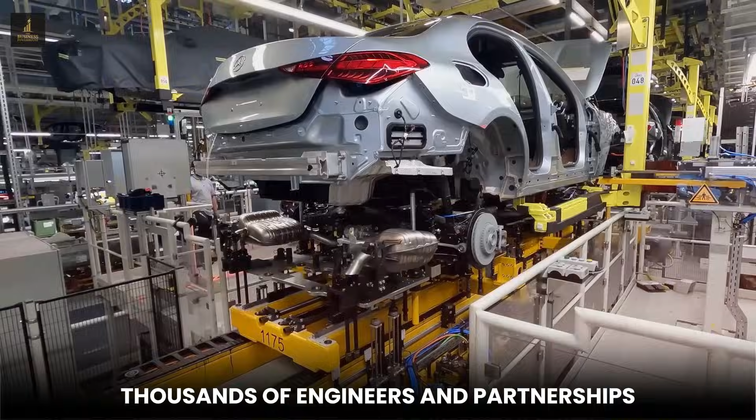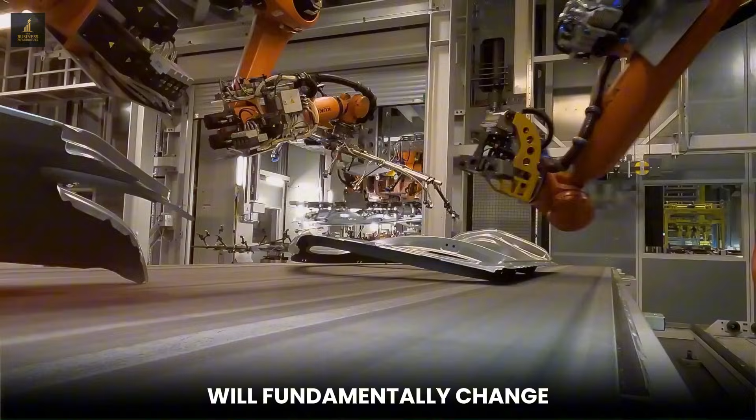NVIDIA just changed everything. After 8 years of development, thousands of engineers, and partnerships with the world's most prestigious automakers, they've cracked the code on truly intelligent, autonomous driving. And what you're about to see will fundamentally change how you think about the future of transportation, robotics, and AI. This is the story of Alpamayo, the world's first reasoning autonomous vehicle, and it's just the beginning.

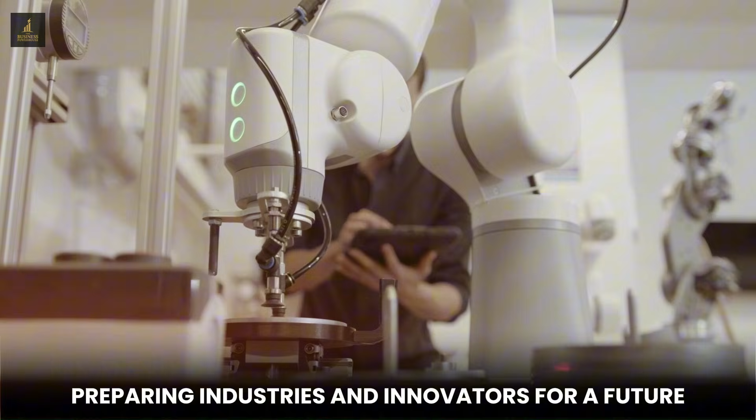One, the foundation model revolution. The world of artificial intelligence is entering a new era, and at the forefront stands Cosmos, the world's leading foundation model for physical AI. This groundbreaking technology has been downloaded millions of times globally, preparing industries and innovators for a future where AI doesn't just think, it acts in the physical world.

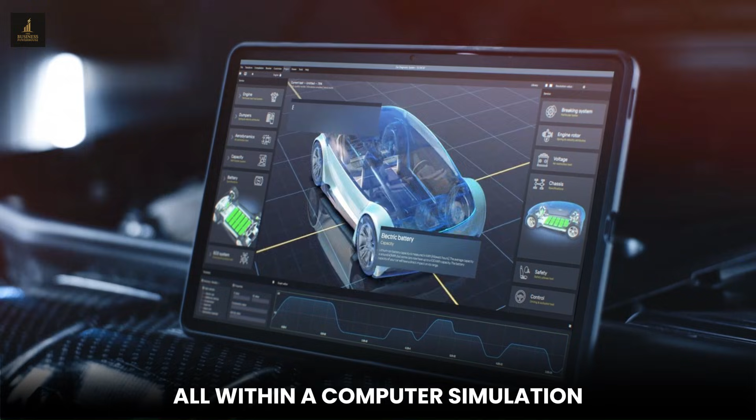NVIDIA has leveraged Cosmos internally to revolutionize self-driving technology. Through advanced scenario generation and rigorous evaluation systems, they've created a platform that allows vehicles to effectively travel billions, even trillions of miles, all within a computer simulation. This virtual testing ground has enabled unprecedented progress in autonomous vehicle development, compressing years of real-world testing into accelerated digital timelines.

The foundation has been laid, the technology has been proven, and now NVIDIA is ready to unveil something extraordinary that will transform how we think about transportation, safety, and the future of mobility. This isn't just another incremental improvement in autonomous driving. This is a complete reimagining of what vehicles can do, how they think, and how they interact with the world around them.

2. Alpamayo, the thinking car. Today marks a historic milestone in automotive history: the announcement of Alpamayo, the world's first thinking, reasoning autonomous vehicle AI. This isn't your typical self-driving system. Alpamayo represents a fundamental breakthrough in how autonomous vehicles process information and make decisions.

Trained end-to-end, literally from camera input to vehicle actuation, Alpamayo processes visual data and directly controls steering, braking, and acceleration. But here's where it gets revolutionary. The system was trained using millions of miles of human driving demonstrations, combined with vast amounts of synthetic data generated by Cosmos. Hundreds of thousands of examples were meticulously labeled to teach the vehicle exactly how to navigate complex, real-world scenarios.

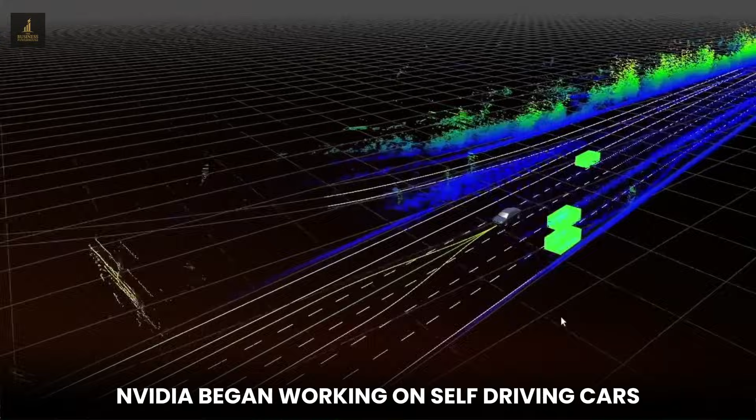4. The 5-layer AI stack. NVIDIA began working on self-driving cars 8 years ago with a singular vision: deep learning and artificial intelligence would reinvent the entire computing stack. To truly understand and guide the industry toward this future, they needed to master building every layer of the system. Think of AI as a 5-layer cake, with each layer essential to the whole.

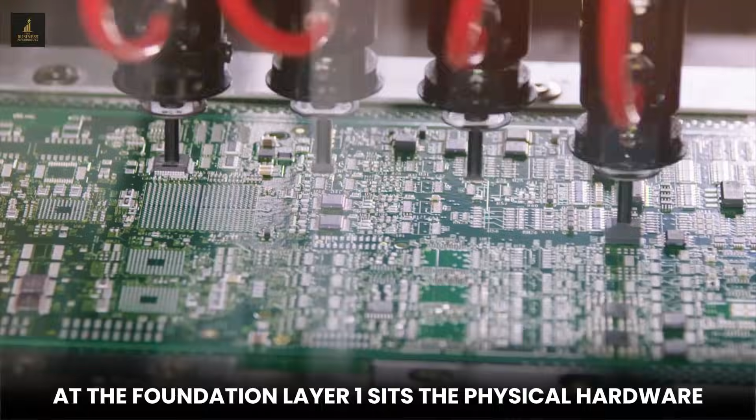At the foundation, Layer 1, sits the physical hardware. In robotics and autonomous vehicles, this is the car itself, the platform that houses everything above it. Layer 2 comprises the computational chips: GPUs for parallel processing, networking chips for data transfer, CPUs for system control, and specialized processors designed specifically for autonomous systems. These aren't off-the-shelf components. They're purpose-built for the extreme demands of real-time decision-making in safety-critical applications.

Layer 3 is the infrastructure, the environment where AI learns and evolves.

For physical AI, this means Omniverse and Cosmos, sophisticated simulation platforms where vehicles can train in countless scenarios without ever touching pavement. Layer 4 contains the AI models themselves. This is where Alpamayo lives, the neural networks that perceive, reason, and act. Finally, Layer 5 is the application, the actual product consumers experience. In this case, that's the Mercedes-Benz vehicles that will soon navigate our roads autonomously.

The Mercedes-Benz partnership: 5 years ago, Mercedes-Benz made a bold decision to partner with NVIDIA to bring truly autonomous driving to production vehicles. Today, that vision becomes reality. Alpamayo is now open-sourced, representing the work of several thousand people on NVIDIA's autonomous vehicle team, alongside the partnership with Ola and the commitment from Mercedes-Benz.

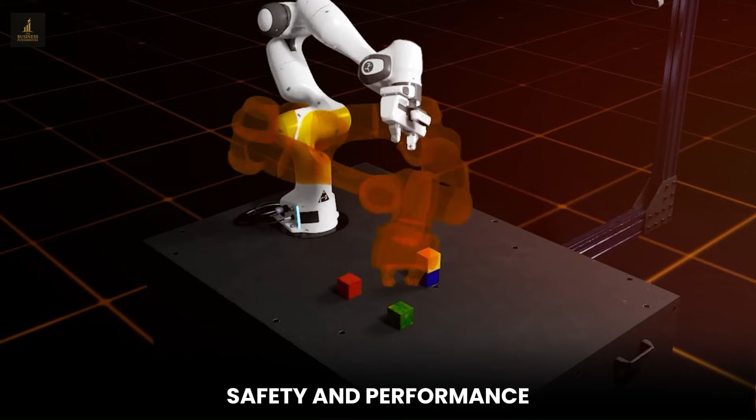In this ecosystem, Alpamayo serves as the model layer, the intelligence that makes decisions, while Mercedes-Benz provides the application layer, integrating this technology into vehicles that meet the highest standards of luxury, safety, and performance. This represents NVIDIA's first, complete, vertically integrated stack endeavor, from silicon to software, from simulation to real-world deployment.

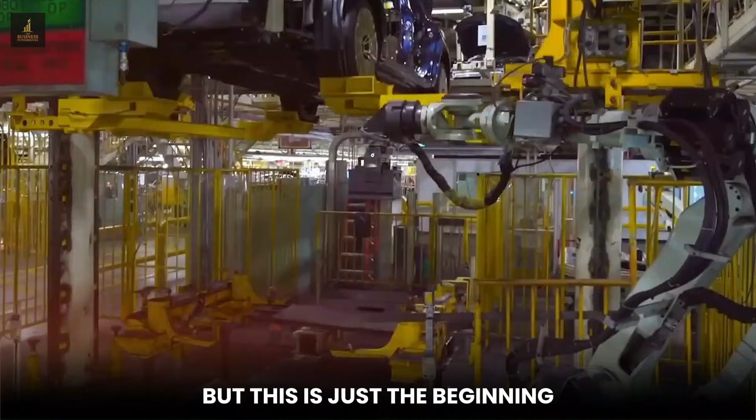The rollout begins in Q1 with the United States market, expands to Europe in Q2, and reaches Asia in Q3 and Q4. But this is just the beginning. The system will continuously improve with updated versions of Alpamayo, each iteration smarter and more capable than the last.

The world's safest car. Safety isn't just a feature in autonomous vehicles, it's the fundamental requirement. The Mercedes-Benz CLA, equipped with NVIDIA's autonomous driving technology, has just been rated by Euro NCAP as the world's safest car.

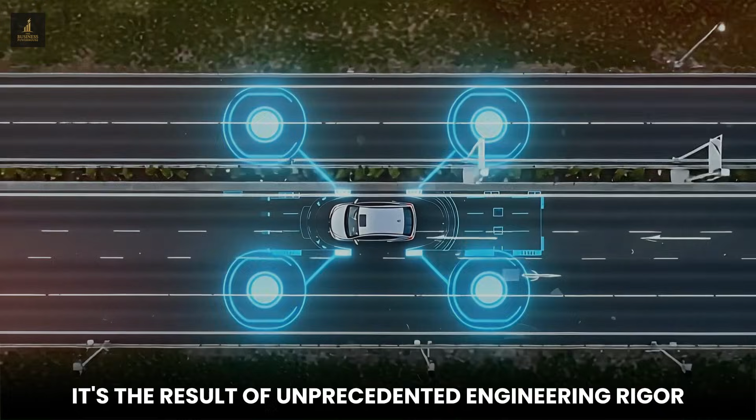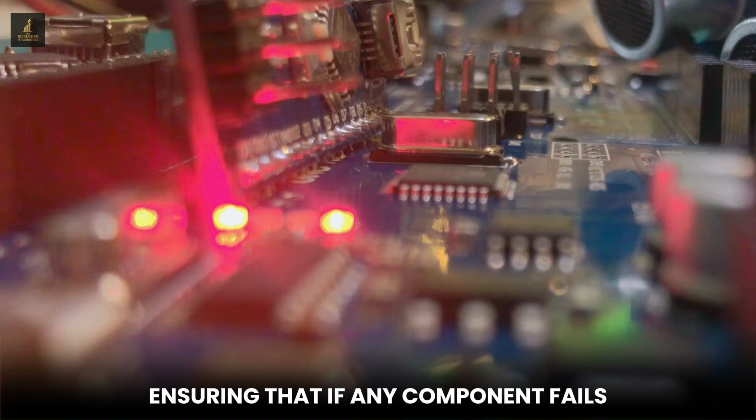This isn't marketing hyperbole, it's the result of unprecedented engineering rigor. This is the only automotive system where every single line of code, every chip, every system component has been safety certified. The sensor architecture employs diversity and redundancy, multiple sensor types, multiple sensors of each type, ensuring that if any component fails, others can compensate. This principle extends throughout the entire autonomous driving stack.

But here's the truly innovative approach. Alpamayo, despite its incredible capabilities, operates alongside a complete secondary AV stack. This classical autonomous driving system is built to be fully traceable, developed over 6 to 7 years specifically as a safety guardrail. These two software stacks mirror each other, constantly cross-checking decisions.

Between them sits a policy and safety evaluator. Think of it as a supervisor that asks, 'Am I confident that Alpamayo can handle this situation safely?' If the answer is yes, Alpamayo takes control, providing smooth, natural, human-like driving. If the evaluator detects any uncertainty or unusual circumstances outside Alpamayo's confidence zone, the system seamlessly transitions to the classical AV stack. Simpler, more conservative, but absolutely safe.

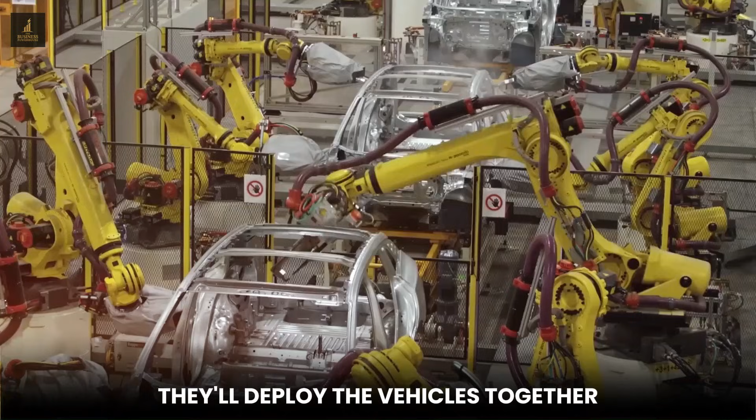Vertical integration and ecosystem. Openness. NVIDIA's approach to autonomous vehicles exemplifies their broader philosophy: build the complete stack vertically, then open it to the ecosystem. With Mercedes-Benz, NVIDIA has built everything from the ground up. They'll deploy the vehicles together, operate the stack jointly, maintain the system indefinitely, and continuously improve it over time.

But just as with NVIDIA's other technologies, building the complete stack doesn't mean keeping it closed. The entire architecture is open for partners and competitors alike. The ecosystem, working with NVIDIA to build Level 4 autonomy and robotaxis, is expanding globally, and companies engage at whatever level makes sense for their business.

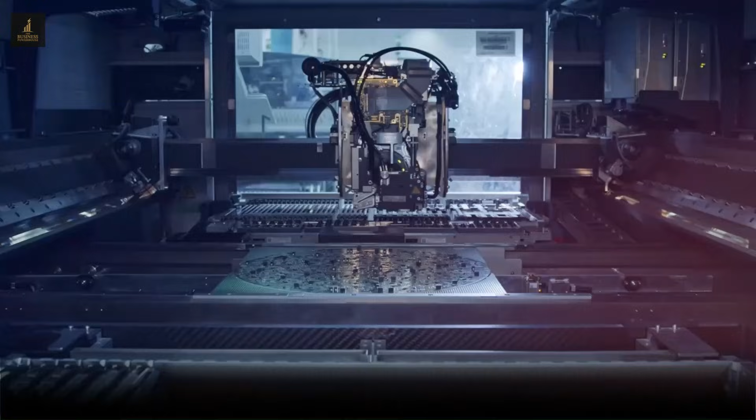Some partners use NVIDIA's infrastructure for training data processing and model development. Others leverage the synthetic data generation capabilities of Cosmos. Some companies focus on the hardware, the chips and computers that go inside vehicles. Still others work with NVIDIA on the full stack, collaborating across every layer.

The flexibility is intentional. Whether a company wants to use a small component or the entire system, NVIDIA provides the tools and technology. This openness accelerates the entire industry's progress toward autonomous transportation. This is already a giant business for NVIDIA, not because they're forcing a single approach, but because they're enabling hundreds of companies to innovate in their own ways, using NVIDIA's technology as a foundation.

The inflection point: we're witnessing the first large-scale, mainstream physical AI market reaching maturity. The inflection point from non-autonomous to autonomous vehicles isn't coming in some distant future, it's happening right now. Over the next decade, a very large percentage of the world's vehicles will become autonomous or highly autonomous. This transformation will reshape society in profound ways.

Traffic accidents, overwhelmingly caused by human error, could become rare historical events. Commute times could transform into productive or restful periods. Urban planning could evolve as parking requirements diminish, and road utilization becomes dramatically more efficient. The elderly and disabled could regain independent mobility.

But the techniques NVIDIA has pioneered for autonomous vehicles extend far beyond cars. The same three-computer architecture, the same synthetic data generation, the same simulation-based training approach applies to every form of robotic system imaginable. Consider the possibilities.

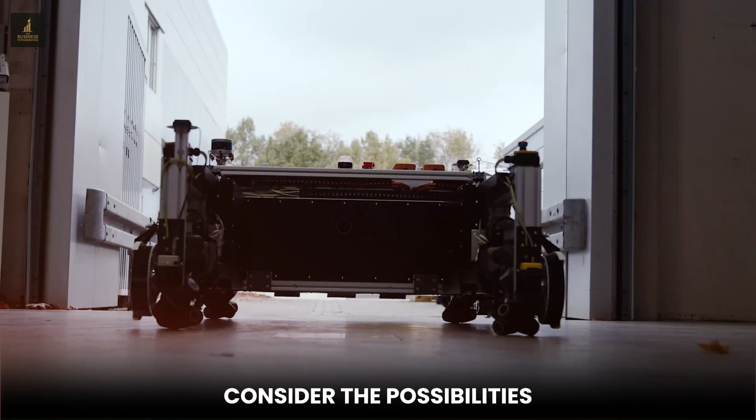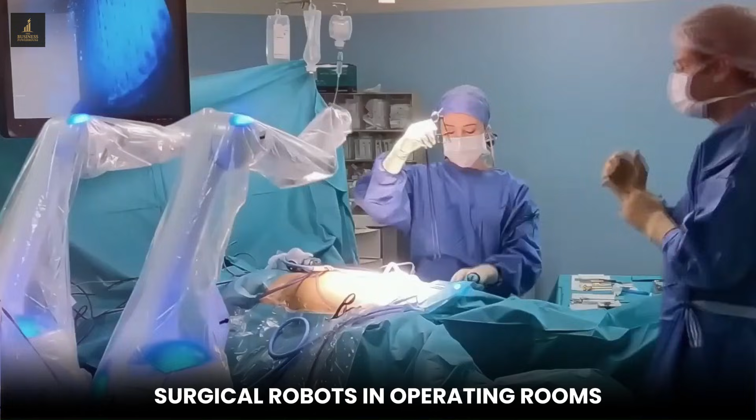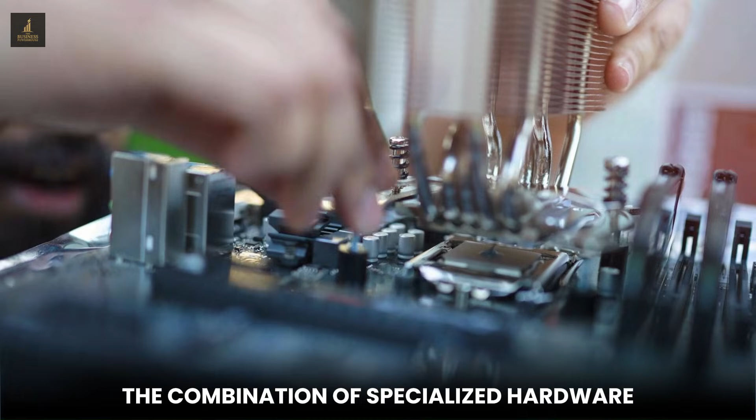Robotic arms and manipulators in manufacturing, mobile robots in warehouses and hospitals, delivery robots navigating sidewalks, surgical robots in operating rooms, construction robots on job sites, and yes, fully humanoid robots capable of operating in human environments, using human tools, and performing human tasks. The technology stack that makes Alpamayo possible, the combination of specialized hardware, sophisticated simulation, powerful AI models, and robust safety systems, provides the blueprint for this entire robotics revolution.

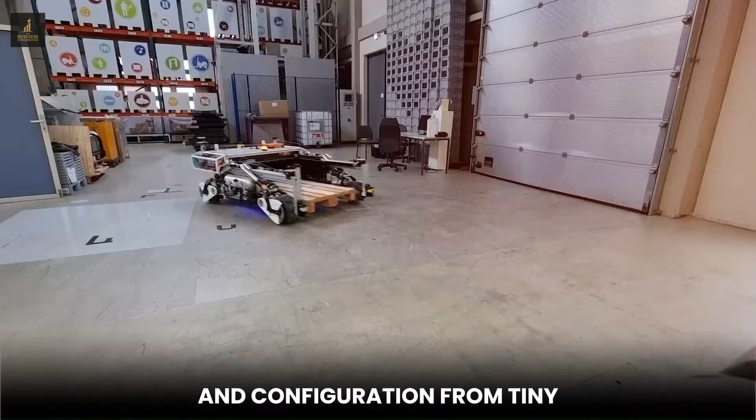The robotics revolution. The next chapter in physical AI is robots, and they're coming in every imaginable size and configuration. From tiny specialized devices with Jetson computers inside to massive industrial systems, the robotics ecosystem is exploding with innovation.

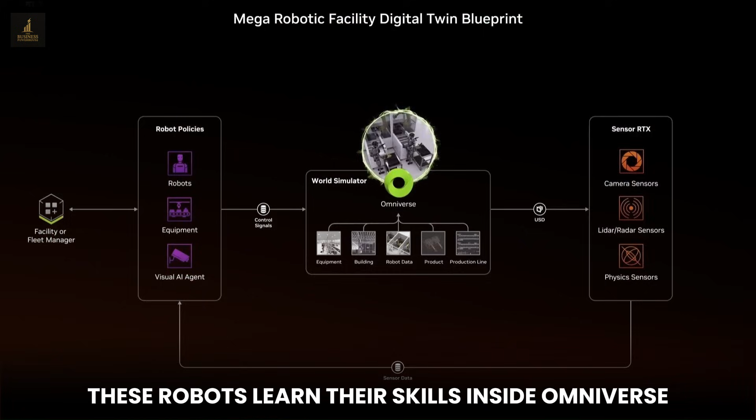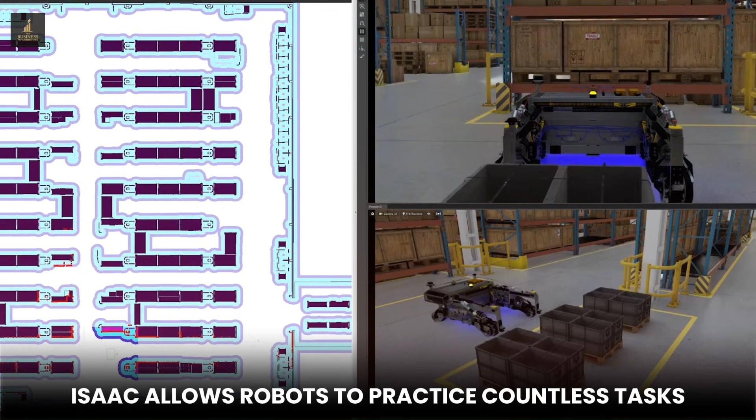These robots learn their skills inside Omniverse, using Isaac Sim and Isaac Lab, NVIDIA's robot simulator that creates photorealistic virtual environments where machines can train for years in compressed time frames. Just as Cosmos enables autonomous vehicles to drive trillions of virtual miles, Isaac allows robots to practice countless tasks, fail safely, and perfect their skills before entering the physical world.

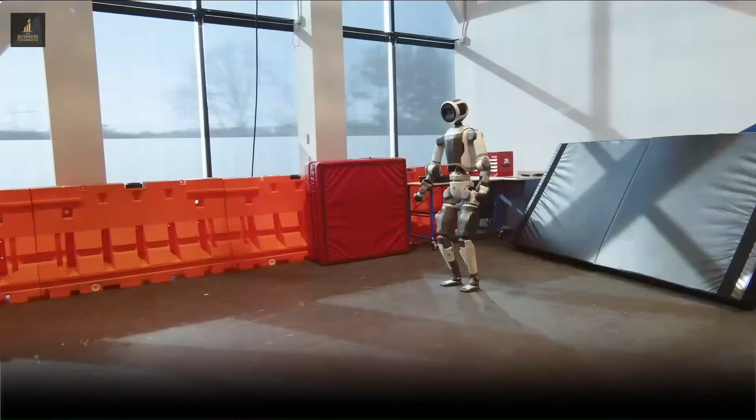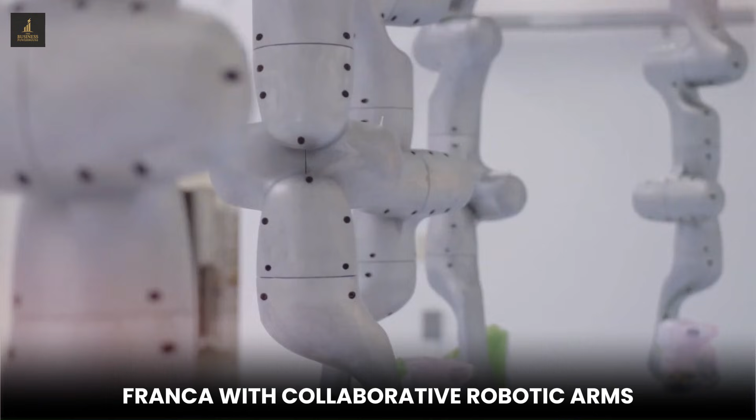The roster of companies building robots with NVIDIA technology reads like a who's who of innovation. Boston Dynamics with their dynamic-legged robots. Agility Robotics with humanoid systems designed for logistics. Surgical robot manufacturers bringing AI precision to operating rooms. Franca with collaborative robotic arms. Universal Robots transforming manufacturing, and newcomers like Neura Robotics and AgiBot pushing boundaries.

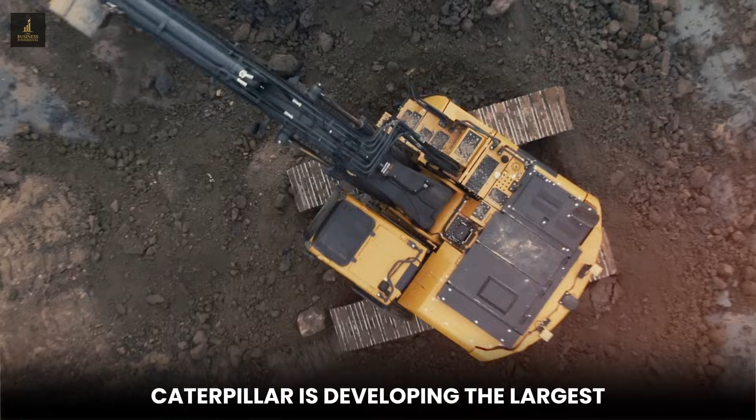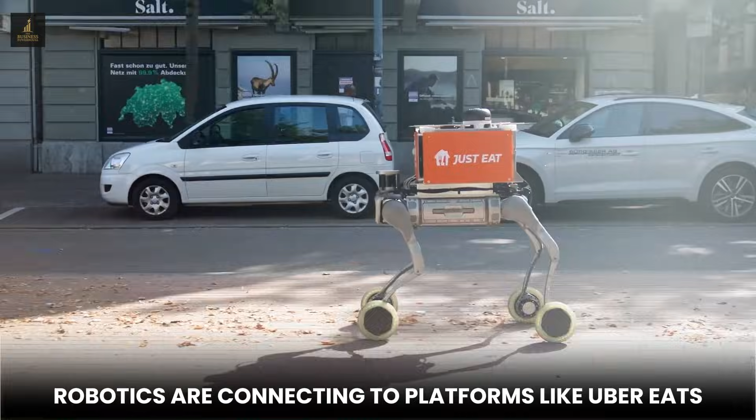Major corporations are entering the space too. LG just announced new robotic platforms. Caterpillar is developing the largest autonomous robots ever conceived for construction and mining. Delivery robots from companies like Serve Robotics are connecting to platforms like Uber Eats, bringing autonomous technology directly to consumers.

Each of these systems, regardless of form factor or application, benefits from the same fundamental technology stack NVIDIA developed for autonomous vehicles. The learning transfers. The simulation tools work across domains. The safety principles apply universally.

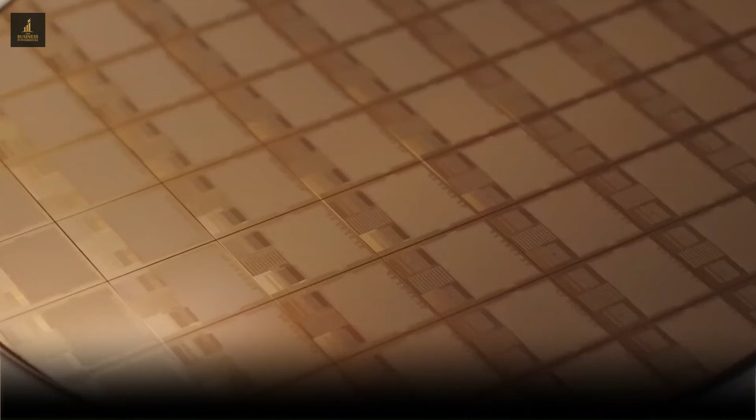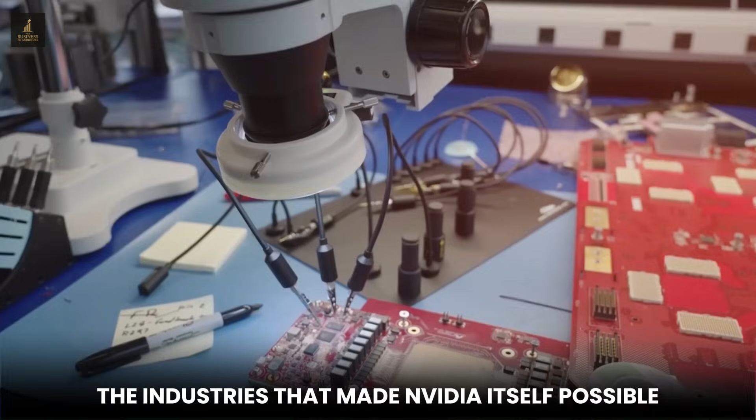Revolutionizing design and manufacturing. The impact of physical AI and AI physics extends beyond the robots themselves to the very industries that design and build them. NVIDIA's technology is fundamentally revolutionizing the electronic design automation, EDA, and system design automation, SDA sectors, the industries that made NVIDIA itself possible.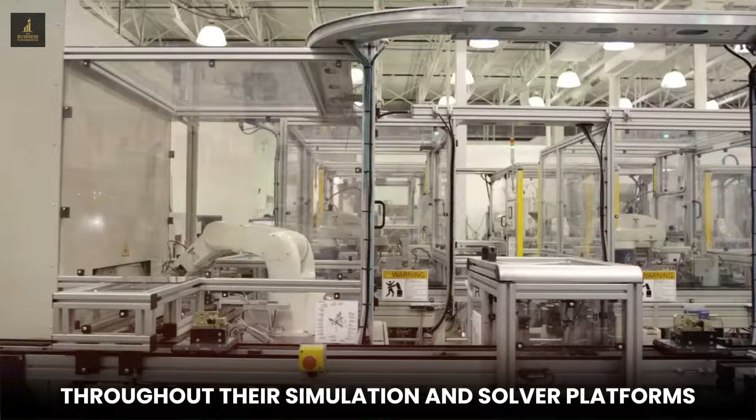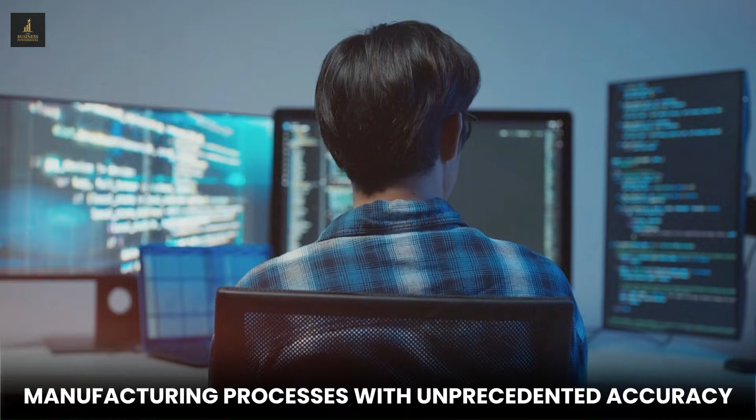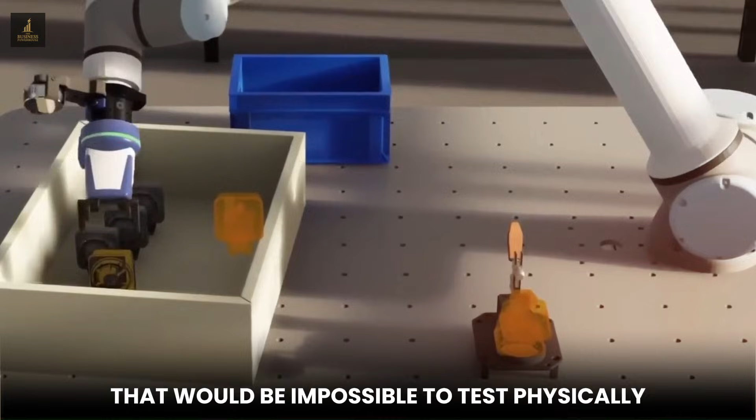Leading companies like Cadence are integrating CUDA and NVIDIA's AI technologies throughout their simulation and solver platforms. Physical AI systems are being incorporated into plant simulations, enabling engineers to model complex manufacturing processes with unprecedented accuracy. AI physics is being woven into design tools, allowing engineers to simulate and optimize systems that would be impossible to test physically. This creates a virtuous cycle.

Better design tools enable better chips and systems, which enable more sophisticated AI, which improves the design tools further. Each iteration accelerates the next. Whether designing semiconductors with EDA tools, creating complex systems with SDA platforms, or developing the next generation of robotic systems, the same technology that enables autonomous vehicles and intelligent robots now revolutionizes how we create technology itself.

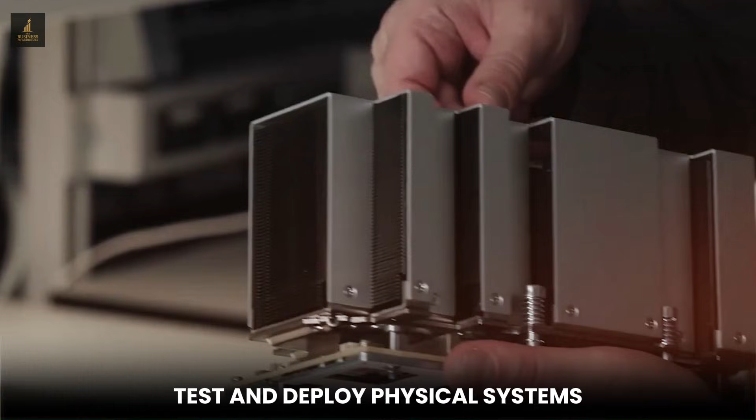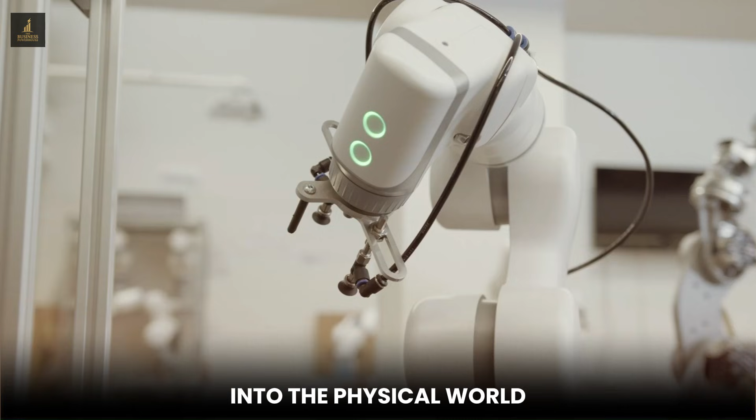The future NVIDIA is building isn't just about smarter cars or more capable robots. It's about a fundamental transformation in how we design, build, test, and deploy physical systems. From the smallest chip to the largest autonomous vehicle, from factory floors to city streets, AI is moving from the digital realm into the physical world, and NVIDIA is providing the complete stack that makes it possible.

So let's recap what just happened here. NVIDIA didn't just announce a self-driving car. They announced the complete transformation of transportation, robotics, and manufacturing. Alpamayo isn't just software. It's proof that we've crossed the threshold into a new era where machines don't just follow instructions, they think, reason, and explain themselves.

This technology is shipping now. United States in Q1, Europe in Q2, Asia by year's end. The world's safest car, rated by Euro NCAP, powered by AI that reasons through every decision. And it's open-sourced, meaning hundreds of companies are already building on this foundation.

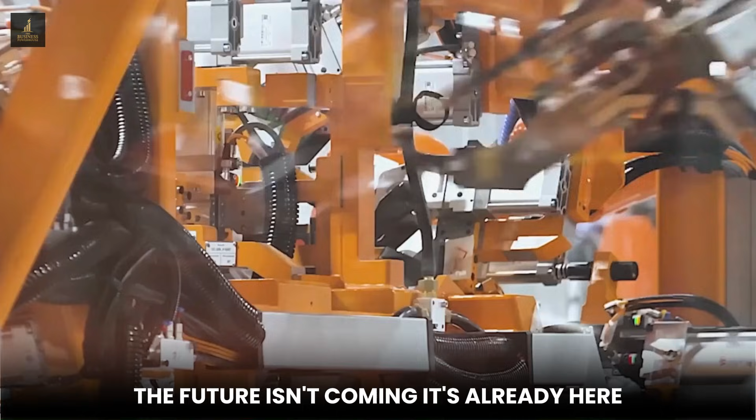But here's what really matters. This is just the beginning. The same technology powering Alpamayo is already training robots in virtual environments, revolutionizing chip design, and laying the groundwork for a future where physical AI is everywhere. From the cars we drive to the robots working alongside us to the tools we use to build the next generation of technology. The future isn't coming. It's already here. The question is, are you ready for it?